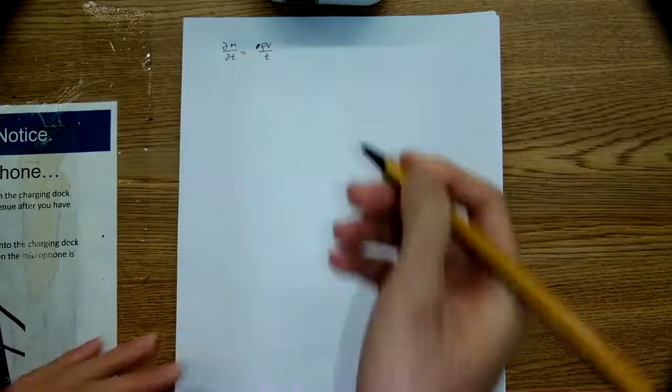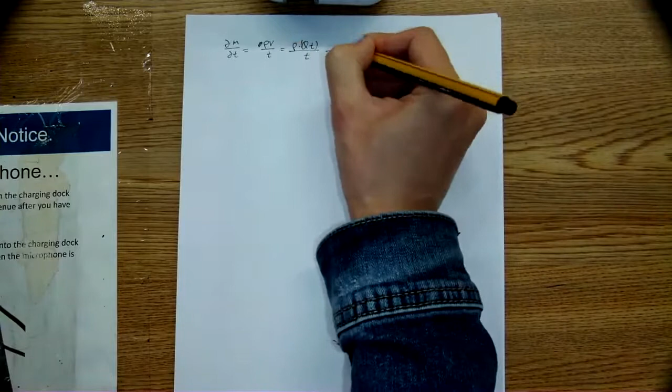Then about the flux of mass. Flux of mass is the time derivative of mass, partial m over partial t. The mass is rho times V, the uppercase V. And here, the volume is the flow rate times t. So if we do not consider t from here and here, then it's rho times Q. So that's mass flux.

Finally, if we know the mean velocity - here it is the mean velocity rather than velocity at a certain point, because we deal with relatively large scale structures like the pipe, open channel, river, or atmosphere - it's a relatively large body rather than the molecular scale. So we normally use the mean velocity to represent the flow. It's easier, although the distribution might not be uniform, but in terms of large scales, we can simplify the problem. Then the flow rate is Q equals U times A.

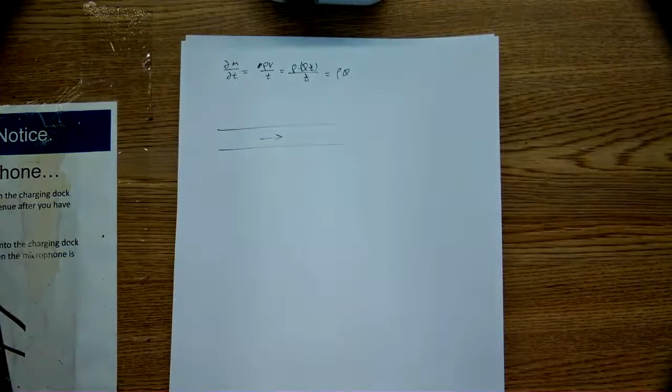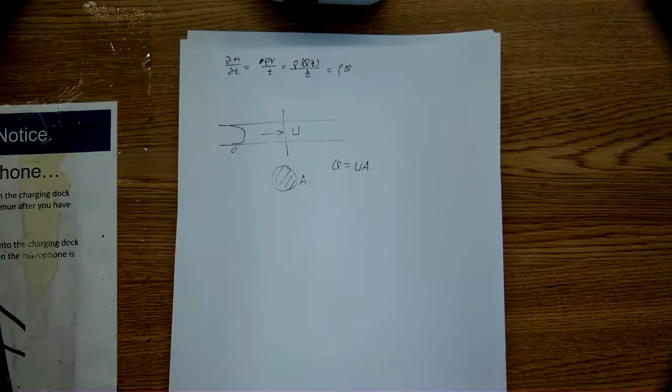So a few examples. For example, a pipe - a circular pipe, and we look at the cross-section, that's the area. And we have a mean velocity, although the distribution might look like this because at the boundary the velocity will go to 0. We do not need to memorize all this here, but in the future we will encounter these problems - here it's just a demonstration. Then the flow rate would be U times A. So for example, if we have a flow rate of 1 cubic meter per second, then if you stay at the end of the pipe, you can collect a cubic meter of water every second. So that's the flow rate.

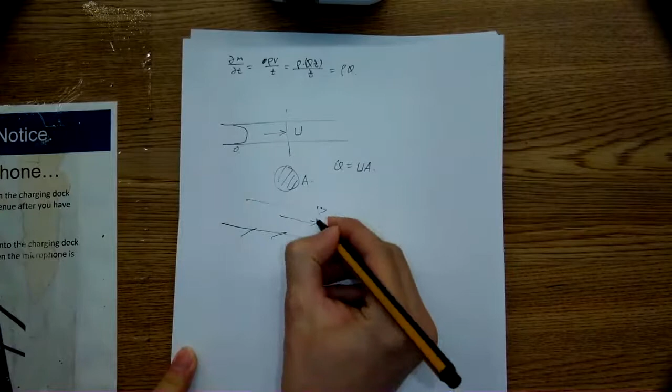Also, like the open channel - if we have a channel, here is the free surface, that's the difference between the pipe and the open channel. So that's the velocity, mean velocity, and area, the dashed area. Then we have the flow rate, U times A, where U is the mean velocity. This can be extended to a natural river where the shape is not so rectangular.

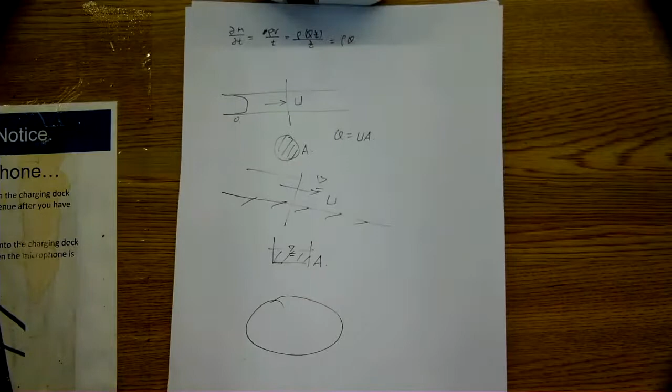So we have a random control volume - the one here is a control volume. If we assume there are a few inlets and outlets, a finite number, we can use sigma to add them together, like the in or the out would be these two terms. But this is a general condition - if there are a lot of inlets and outlets, in a more elegant way we can do integration. So this is the integration form of the conservation of mass. So there are two different expressions - for the first one, we can write it in a simpler way.

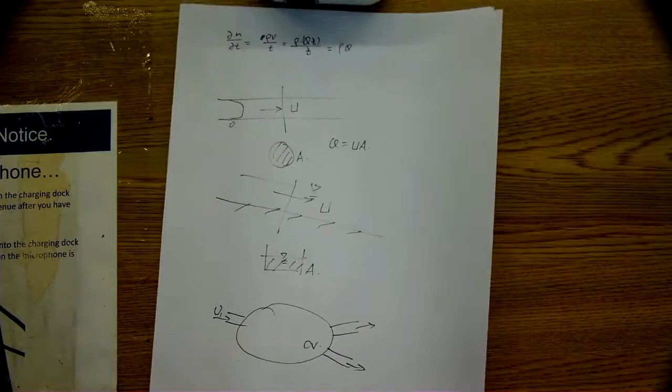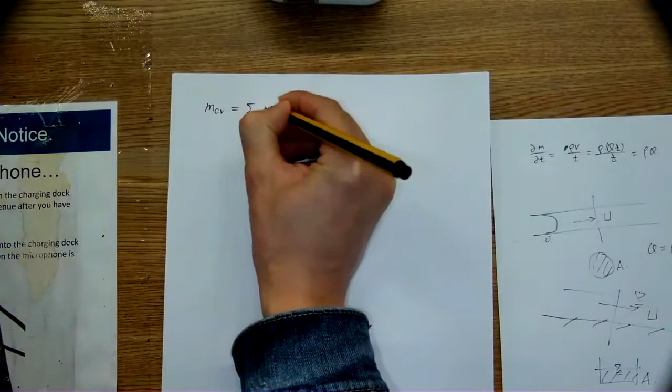The mass in the control volume equals the mass in minus the mass out, plus the mass originally within the control volume. So this is a more understandable way: the amount of mass, then how much comes in, how much comes out.

It's like a bus full of people. If there are 3 going onto the bus, then 3 have to go out, right? So it's like a conservation of mass.

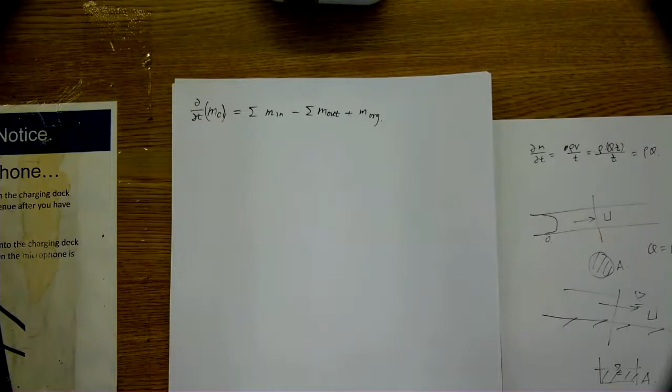Normally in fluid mechanics, we deal with the flux of mass. That's the time derivative, so we use partial t for each and every term. Then we come to this equation, so m dot is partial m over partial t. We simply use a dot, but it's equivalent to the partial t. And the original one, if we do the time derivative, that will go to 0. So that's how the first equation comes.

Then the second form, the integration form, is a little bit more complex, but basically the same. If we do an integration of dm/dt, then in terms of the volume change, the change of the volume in the control volume, so without inlet or outlet, that's...

m is rho times V, where the uppercase V is the volume, dt. So if we take rho out, then this is the left-hand side of the second equation.

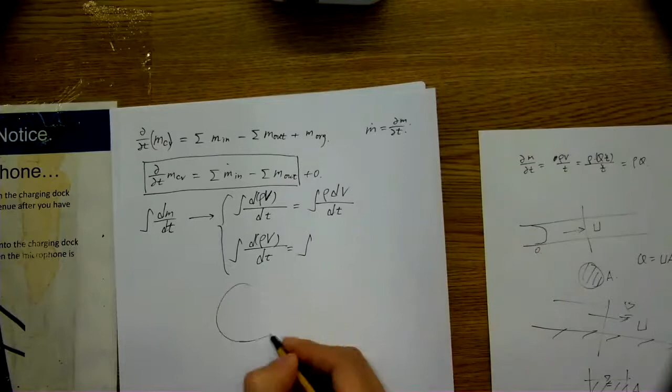...still rho V, the volume, dt, but here the volume is based on an area - if we assume this is a control volume, there's a pipe or a jet, then we have an area. This is the dA, expressed here. This is a small area dA where the fluid is going out, so it's very small.

Velocity is perpendicular to the area, so we can calculate velocity times area. So u dA relates to q times t, giving us a volume - this amount of volume going out. We replace V as u times t, then dt, which gives us rho u A, that's the rho u dA here. We assume rho and u are not related to the integration, a constant.

Then we have the second expression.

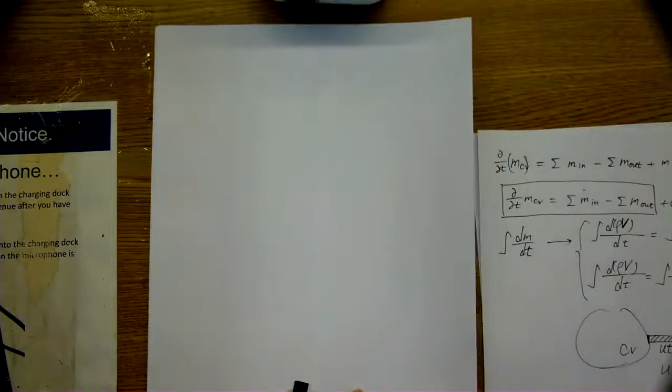So we can assume the flow is steady and incompressible.

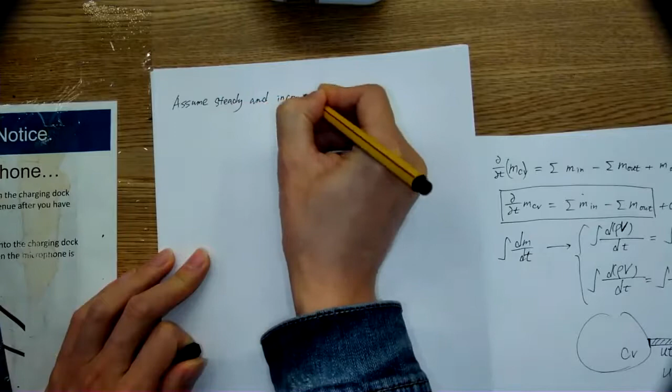So based on the previous slide, we can use the simple form of the equation, Q in equals Q out. And here, because there is only one inlet and only one outlet, we can define inlet as 1 and outlet as 2. Then for Q in, it equals U1 and A1 for location 1.

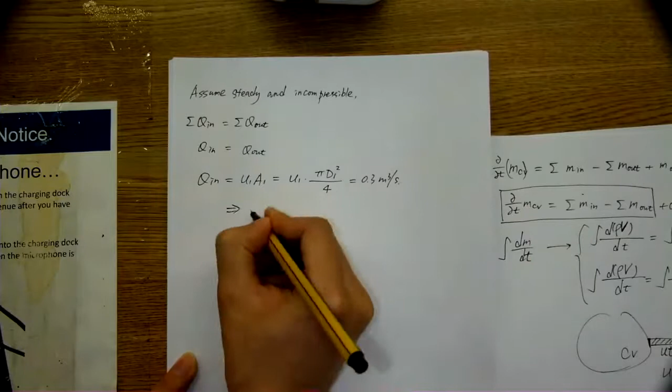U1 is what we are going to solve, and A1 is pi d1 squared over 4. And the flow rate is given as 0.3. So this gives us U1. You can double check the calculation later, I'll give the answer directly.

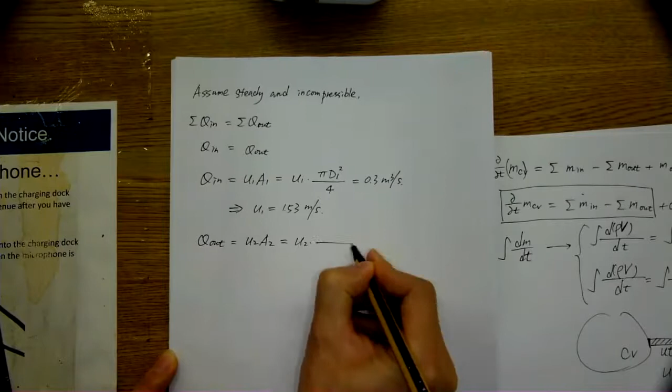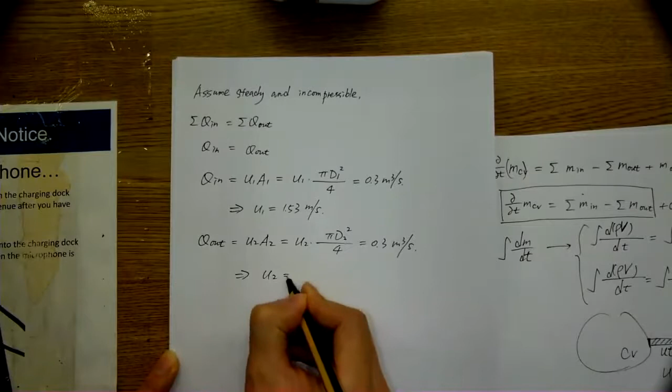So we can do the same for location 2, and we also have the same flow rate, so we can work out the velocity for the second point. So we can double check: the highest velocity is around 38, so it's well below 100. So our assumption is correct, it is incompressible. Here, because of the contraction, we have a much increased velocity for the outlet point.

Let's move on to the conservation of momentum. This one will be uploaded to the LMS, and you can see the solution later, or you can even take a photo after the lecture. So, conservation of momentum.

Momentum is like a force, the force induced by the fluid, and it's basically Newton's second law of motion. It's similar to solid mechanics: when you push a small car, then it moves.

So we have force equals mass times acceleration, in vector form. If we push the car in this direction, then it will accelerate in that direction as well. And here, we can replace acceleration with velocity - this is the lowercase v, since uppercase normally represents volume, so here it's the velocity.

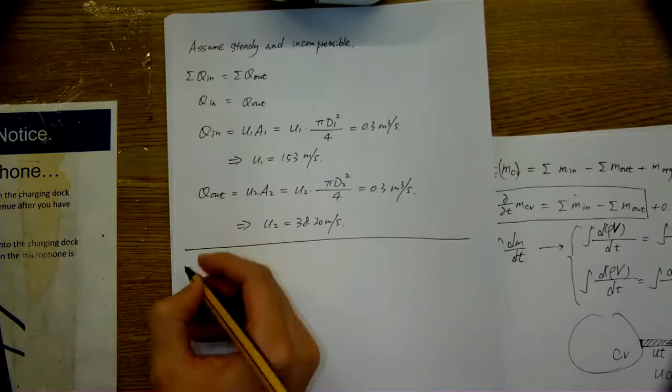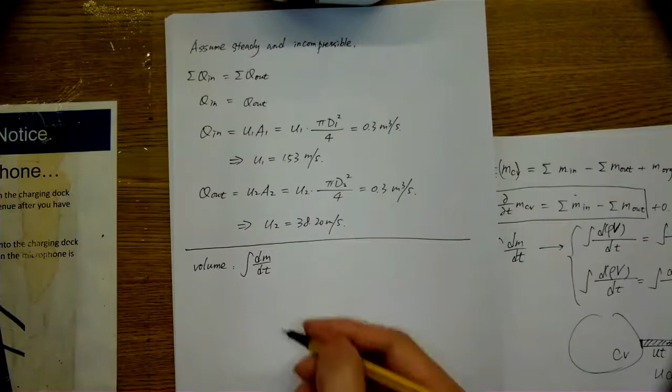So the first term on the right-hand side is in terms of the volume, so it is accumulating within the volume. We have dm/dt. But we take into account the velocity later. So this is the expression of rho dV over dt.

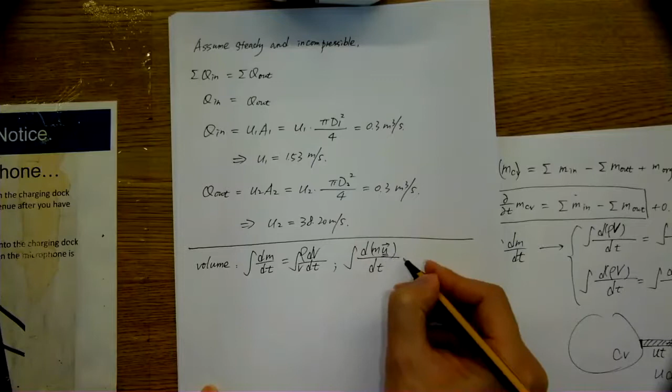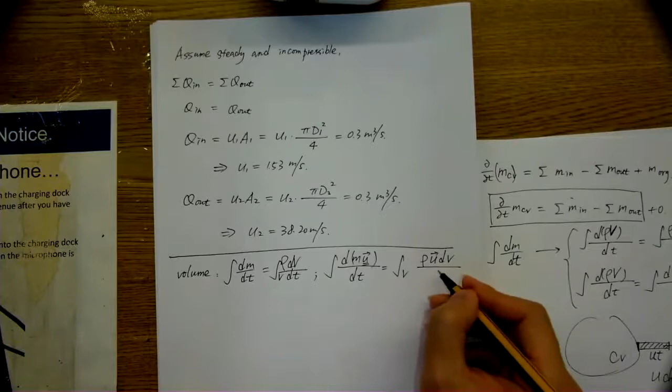This is an expression for conservation of mass, as you can recall from the first equation. Then if we also consider the velocity, it can be expressed as u or v, but it's a vector form. We add u here, and have the integration based on the volume: rho u dV. So this is the first term on the right-hand side, and it accounts for the increase of momentum in the control volume. It's not going out of it.

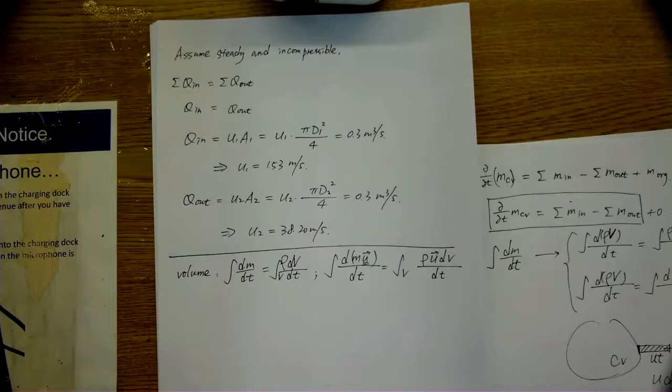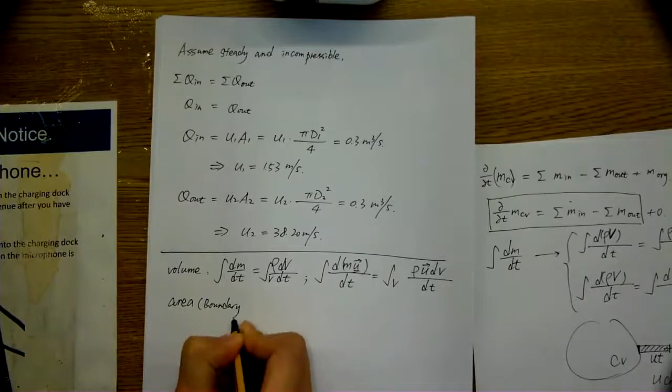And second, in terms of the area or boundary of the control volume, it spreads out. For the conservation of mass, we have the integration around the boundary of the control volume. u_n is the velocity perpendicular to the boundary of the control volume. As for the momentum, we just add a vector velocity, in terms of integration based on the area or boundary. That's why we have one vector form of the velocity and the other perpendicular to the boundary of the control volume.

Here, two velocity components. And then we have the integration form of the conservation of momentum.

Then in a general case, if we look at a finite number of pipes going in and out, we can use sigma to add a few pipes, a few inlets and outlets. This is the same expression as the previous one, all the forces, and we just separate inlet and outlet for ease of calculation.

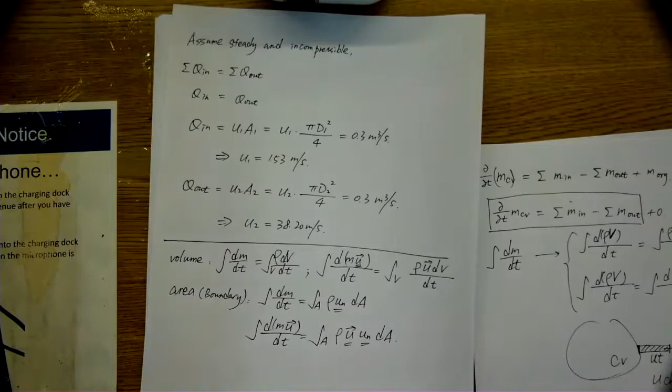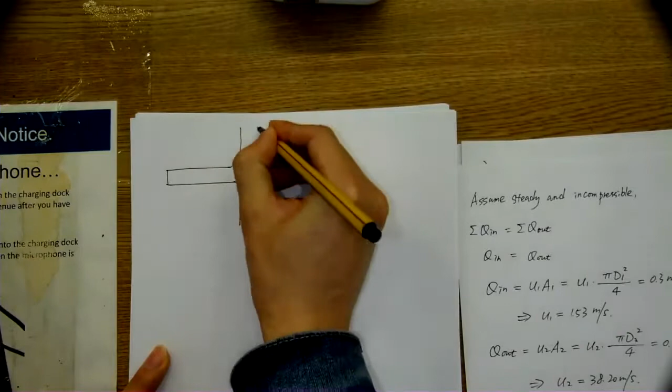So here we have an example. Water is accelerated by a nozzle. We can draw a sketch. Water is accelerated by a nozzle so the nozzle will go from here, but we don't have to consider it, to average speed. As you can see, this is the mean velocity of 20 meters per second.

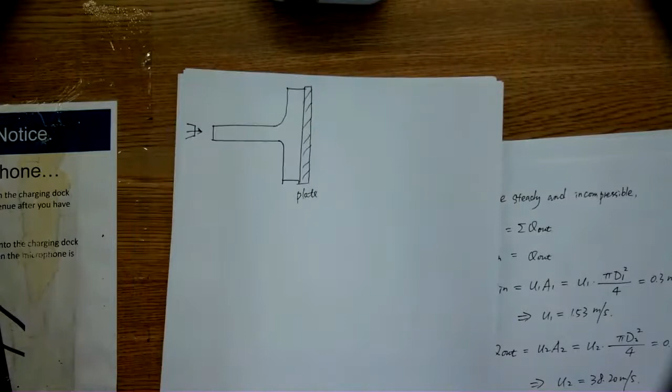Jet strikes a stationary vertical plate, the one with a shaded shape, at a rate of flow rate, liter per second. It's different from the conventional cubic meters per second. So if it's 10 liters per second, that means 10 divided by 1,000 cubic meters per second.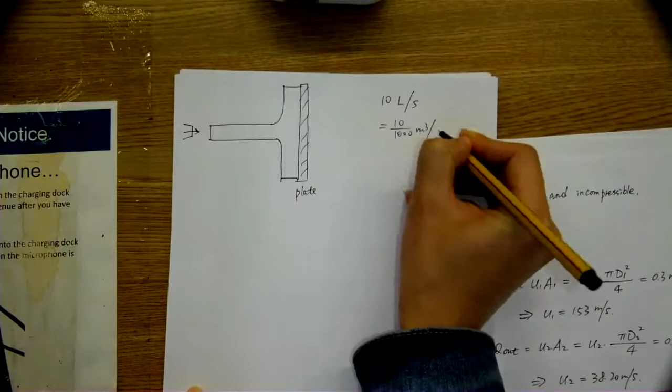So for the calculation, we first convert all the numbers to a standard unit set. For liter, we pay special attention and need to convert it into cubic meters per second. And also for centimeters, we need to convert it to meters.

And after striking, so this is the velocity at 20 meters per second. After striking, the water stream splatters off in all directions, goes up, goes down. So actually this three-dimensional problem, the jet goes from left to right, and there's a huge plate, and it goes around it, so it's all directions, up and down, left and right.

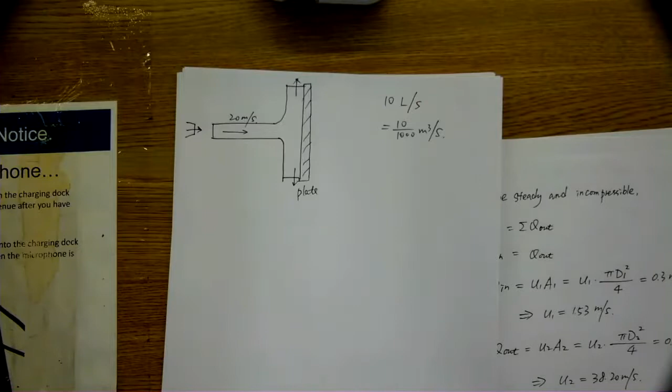Then determine the force needed to prevent the plate from moving horizontally due to the water stream. So as you can see, it asks us to calculate the force to prevent the plate from moving horizontally, meaning the x direction. We need to apply a force to hold the plate because intuitively, if the velocity goes from left to right, it will have an impact force. So the force will go opposite to the direction, although we will calculate it later, but we need to hold it with that force. So in this case, we can consider the x direction.

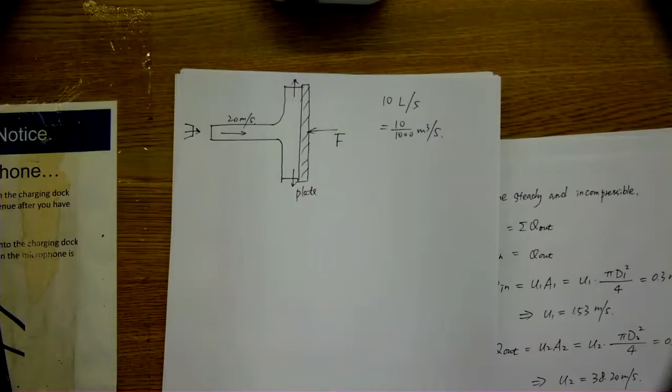Then the second step, we need to choose a control volume. The control volume can either include the plate or not include the plate. So in this case, we can use a control volume that is the dashed line here.

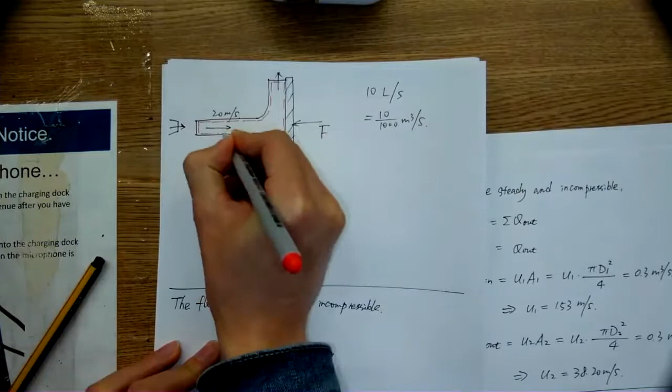So this is a control volume, the amount of water here. So if we draw another sketch.

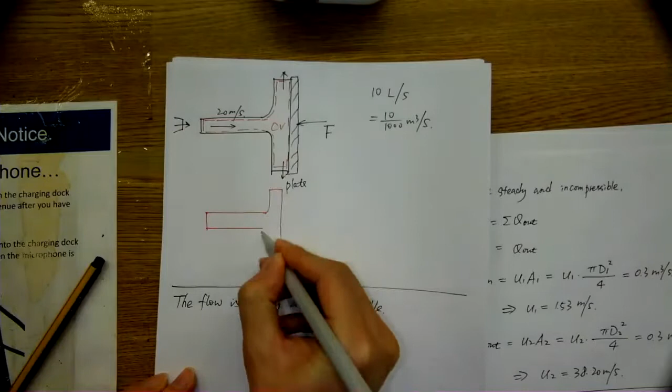This is a control volume, the water. Then we have an inlet velocity, 20 meters per second. So that's U in.

And we have some outlet. So although it is drawn like two ways, actually it goes around this plate. So there's some rho Q U out, or just say U out. Rho Q would be the force. Or we can also say this is rho Q U in.

So if it's a force balance, like a free body diagram, then we need some force to hold this plate. We don't have to say this is to the left, but there's a force. We can work out the direction of the force later. So this is our control volume or free body diagram.

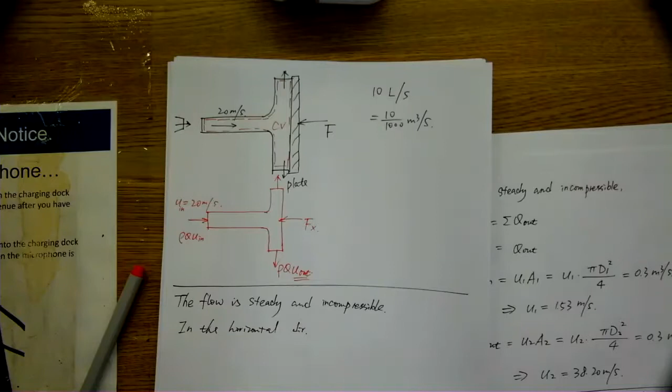Then in the horizontal direction, we can work out the force. The basic formula is written in this way: out is first, then minus in. So that's the equation.

Because there's only one force, the force due to the solid object, there's only one force in the horizontal direction. For vertical, we need to pay attention. There is a gravitational force everywhere, but in the horizontal direction there's only one force due to the plate. So this is actually the force from the plate to the control volume. We are looking at all the forces acting on the control volume.

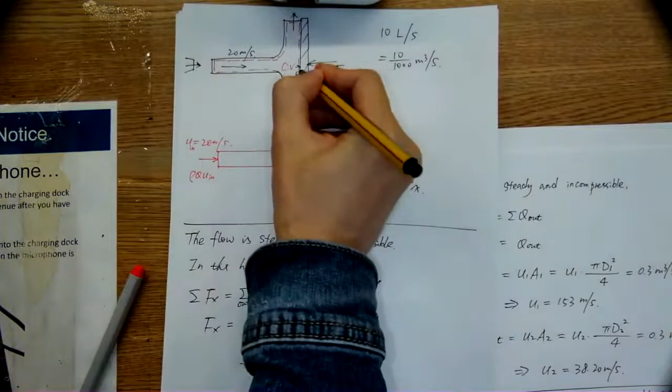So this is the force acting on the control volume equals to, because all the outward directions are not in the horizontal direction, it's all in the y and z plane. So this is x, but the out is not in the x direction because as you can see, there's a plate to reduce the velocity to 0. If you will say this is outlet, then the velocity will go to 0 in the x direction.

So for the in, there is one inlet, only one inlet here. We know the velocity, we know the flow rate. Density, we can use 1000 or sometimes 998 for the solutions given in the tutorial, but you might notice a very small percentage difference in your calculation, like less than 1%, but it doesn't matter. Sometimes it is caused by the density.

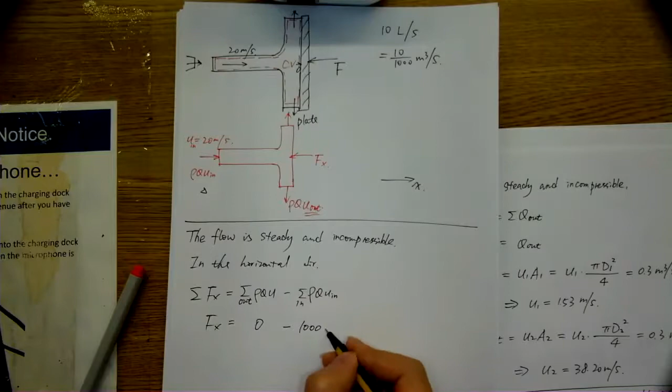And this is the flow rate, 10 liters per second, converted to cubic meters per second. Then we have the velocity U in. This gives us a negative force, so minus 200 newtons. So these are all the standard units. This gives us straightforward newtons.

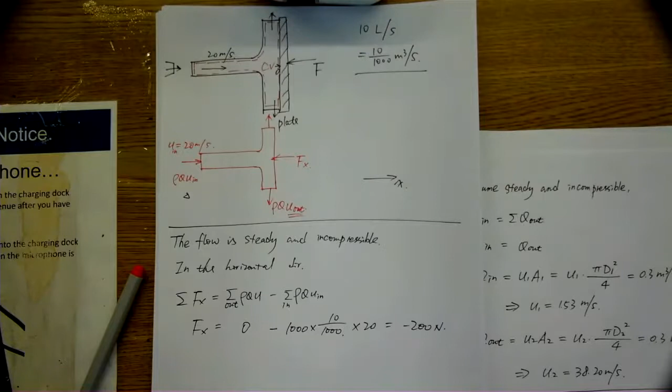Then because we assume the positive x direction, as you can see, is to the right, so as the velocity of in, here U in is positive, but there's a negative sign here, so the total force will be negative. And here it gives us negative force, which means the force acting on the control volume is opposite to the x direction. We assume then it is to the left, as the same as our intuition here.

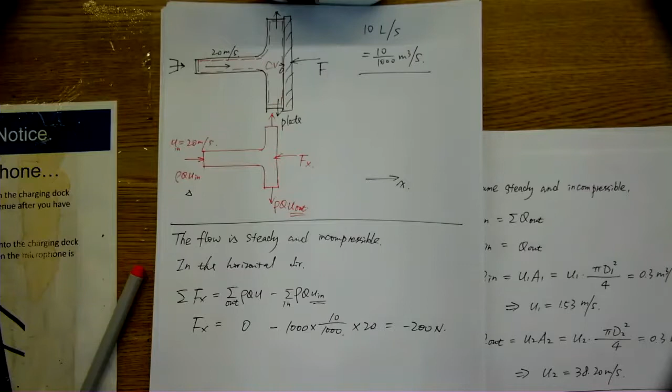U out, right? This term, right? Okay, yeah, because we look at the horizontal direction here. Yeah, so this is 0. No, there's no silly question. Welcome all the questions. That's the benefit of you guys waking up early and coming to class.

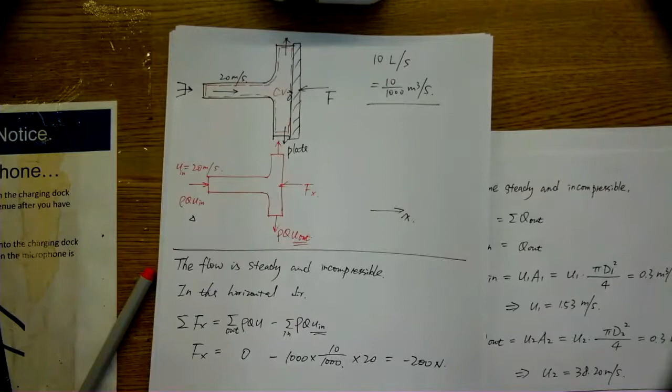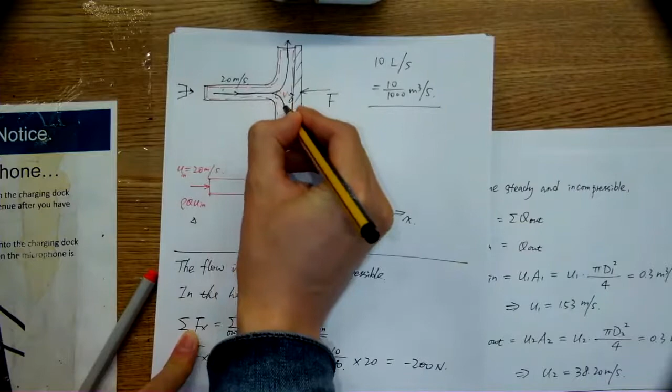So here, any questions, just raise your hand or let me know. Here, the velocity out goes to 0. So actually, if we draw some streamlines, the velocity will go to all the directions parallel to the plate, right? It does not go through the plate, it goes around it.

So that's why in the horizontal direction it goes to 0, but in other directions it might be of some value, like in the vertical direction. But just another note, because it goes around the plate, the forces will cancel out. It goes every direction, then the left will cancel right, up cancels down.